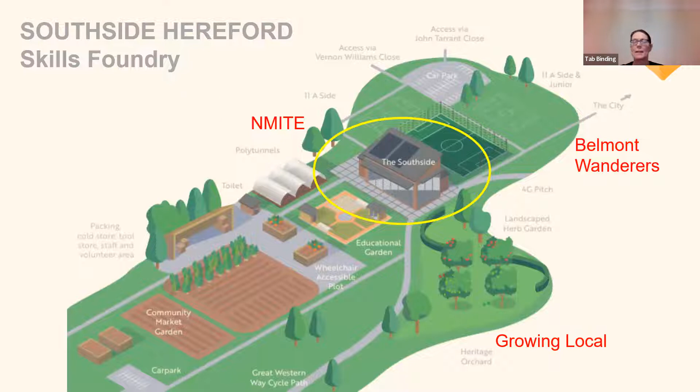The Southside Hereford University Design Challenge is interdisciplinary, cross-university, and a team challenge to design, engineer, specify and cost a community building from timber to Passivhaus standards. It's a live building, about 800 square metres, with a budget of 1.6 million. The site is on the boundary of two fields, a greenfield site, formerly park and farmland. I'll pop a link in the chat.

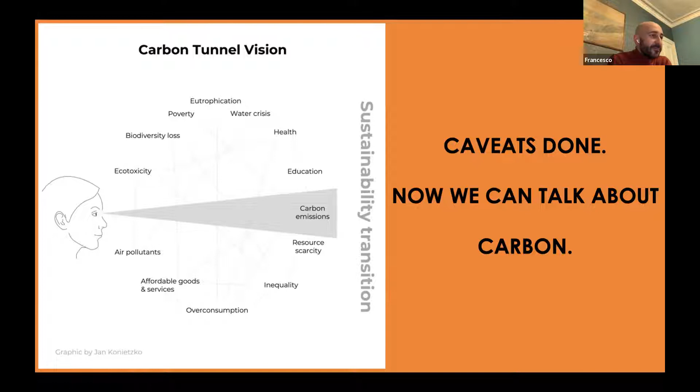But it's not as simple - there are other things, not just on the environmental side, also on the social side. It's important we remain vigilant on all the others and avoid this carbon tunnel vision. Now, caveats done, I'm happy to talk about carbon, knowing that you all know it's not the only thing that matters.

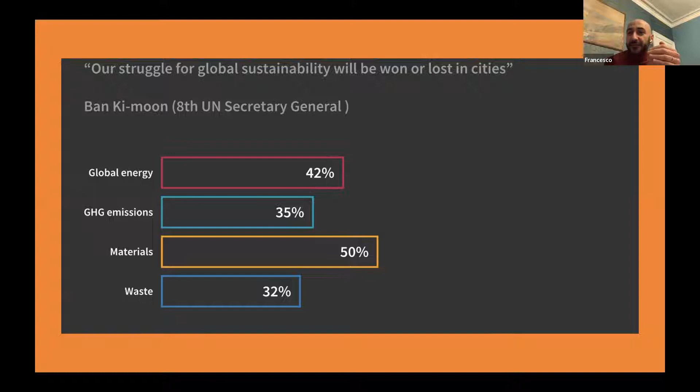If anyone is in doubt as to why we really need to put buildings and construction at the heart of the sustainability transition, it's because they matter the most. Ban Ki-moon, the 8th UN Secretary General, put it clearly: the global struggle for sustainability will be won or lost in cities. That's because buildings and construction are the top contributor to resource extraction, waste generation, emissions, and global energy demand. By working on our buildings and cities, both existing and newly planned, there's a lot of good we can do for the climate crisis.

Surprisingly, building regulations in this country have been around for decades, and at a European level, generally in the Western world, we've worried a lot about what happens to buildings when we are in them. That's logical, because that's when we experience the building, so we've worried about energy demand, insulation, air tightness, comfort. But at some point we realized buildings do not just happen to exist - they get built, and eventually we knock them down. So it was important to structure the life cycle of a building to capture everything that happens, not just the use phase.

If you want to build a very poor building from an energy efficiency perspective, there are regulations that, in theory, prevent you from doing so. If you want to build a building that's very poor on the carbon side in terms of embodied carbon, at the moment you can.

The good thing is that 11 years ago, a standard came out of the European Union that started slicing the life cycle of a building into different stages.

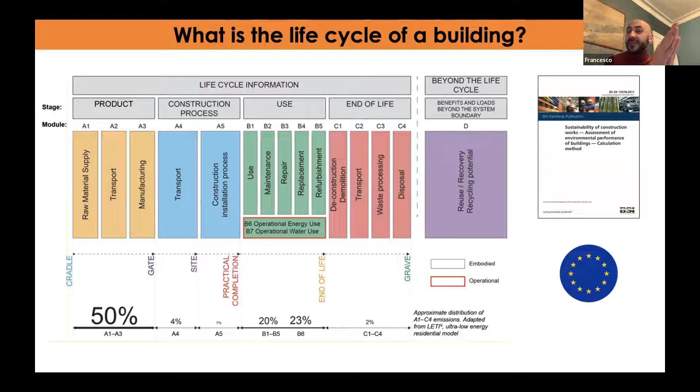There's something I'm sure will be touched upon, probably by Adrian, in terms of circular economy - Module D, which is everything that happens beyond the life cycle of a building. It's very, very important.

Ten years later in the UK, we thought it was time to clarify terminologies, because we couldn't agree on what to call things. There's a nice publication by LETI - if you don't know what LETI is, just visit leti.london, it's a great network really worth following. Also the RIBA and the whole life carbon network I mentioned at the beginning.

To put the terminology clear: we decided embodied carbon was a bit confusing because it involves both things that happen before a building is occupied and after it has been occupied - things we can control to an extent now, and things that might happen in the future where we have really poor visibility.

So we decided to focus on upfront carbon as a terminology that captures what's happening in the here and now - the product and construction stage. Then embodied carbon plus operational carbon make up the whole life carbon. Module D stays out, and is really focused on the circular economy, to ensure we don't mix things that might happen in the future with impacts happening now.

There's still a lot of debate, and there are even subcommittees discussing Module D - I generally take one of my children when there's a subcommittee meeting, because that's the level of conversation they can handle.

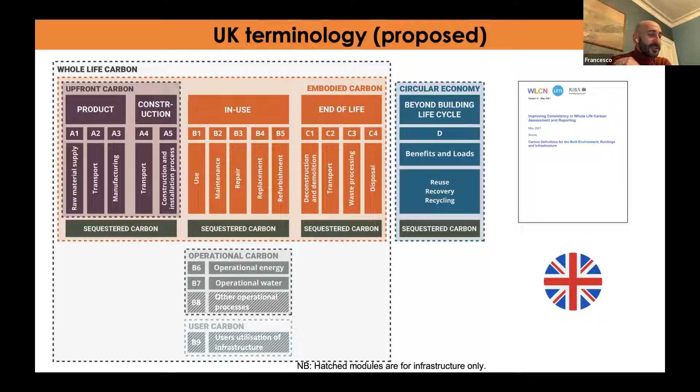Now, after this introduction, consider this simple question: if we're able to achieve zero carbon buildings in operation, then 100% of the whole life carbon of a building like this is going to be embodied. That's why embodied carbon matters so much within a whole life carbon perspective.

Because if we keep making progress in basically eliminating the carbon emissions linked to the operational phase—if you think about Passivhaus, for instance, that's a good example where, in theory, you can achieve a carbon-free home while you're in it. There will be energy going around, but it's coming from renewables, so it's not incurring carbon emissions, which is great. But this implies there's a lot of embodied carbon right now that we need to focus on, and we're not focusing on because there's no regulations in place for it.

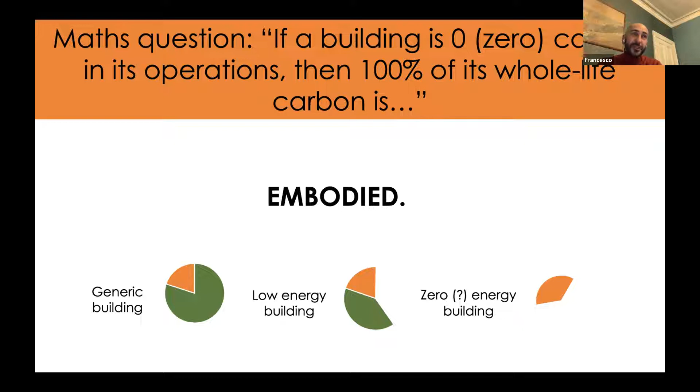Though there is Part Z, a proposed amendment to building regulations, discussed in Parliament tomorrow morning for 10 minutes.

Now, just to explain why this is crucial, I'd like to draw your attention to this case. There are two cases where decisions are obvious because something benefits either the embodied carbon or the operational carbon—no brainer. But there are a few cases, and this is important in a design challenge, because you need to think about the consequences of your design choices in both the short and the long term.

Let's say you have a regular wall insulation—that's product A—with a certain embodied carbon. Then you have a thicker wall insulation, which performs better but incurs more embodied carbon—that's product B. This causes an embodied carbon premium to start with. So at year zero, when you finish construction, you have this premium that you've chosen to incur to put a better product in your building, and that's great. That better product is going to perform better than the alternative year by year for a long time, and at some point it will repay its embodied carbon premium.

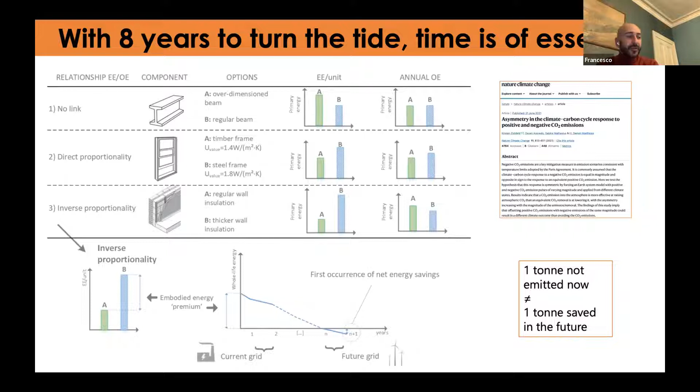So we need to think about embodied and operational carbon as two sides of the same coin. Sometimes they work in harmony, other times in contrast. It's important we're aware of the relationship so that if they work in contrast, we can figure out the trade-off. For instance, if a product takes 20 years to repay its embodied carbon premium, then in 20 years the UK grid is very likely heavily decarbonized. So I'm not sure it's worthwhile right now incurring that embodied carbon premium on a dirty grid, only to break even in the future on a much cleaner grid.

Now, if we go back to timber, which is what we're all here about, I think trying to put the scientist hat on, we should be aware of strengths and weaknesses so that we can make the most of it, because it's a great material.

So timber is low carbon. By low carbon, I mean that the processing, products and manufacturing behind timber incur fewer carbon emissions than its alternatives—and that's a fact. So timber is better than the alternatives because it incurs fewer carbon emissions.

Timber is also bio-based, which is great news, because when trees—general biomass—grow, through photosynthesis they sequester carbon and use it to grow. Timber is also naturally grown. Now, if someone manages commercial forestry, they'll tell me, don't think you just plant the trees, bugger off for 30 years, come back and harvest—that's not what happens. Surely there's a lot of inputs, care and activity involved, but I'm pretty sure it's not as much as quarrying or mining iron ore, transporting it through global supply chains, and firing kilns at 1500 degrees Celsius. So we have a lot of help from nature in giving us this amazing material that we can use to build our buildings and cities.

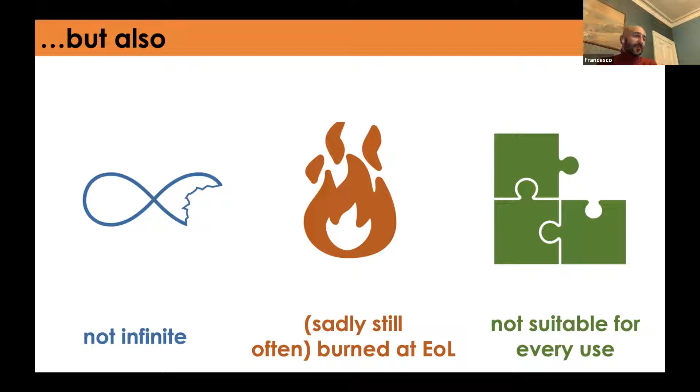So if we accept that, okay, we can do 98% of things with timber, that's great. Think about this design challenge, but also think about potentially informing some calculations in industry.

To prove our point, what we did was—because previous comparisons worked at either a building element or mass basis, and this isn't useful as a functional unit because you don't use the same amount of timber and steel in a building, and a timber beam is very different from a steel beam. So what's the point of comparing structural elements? We thought we'd go in with the full building design.

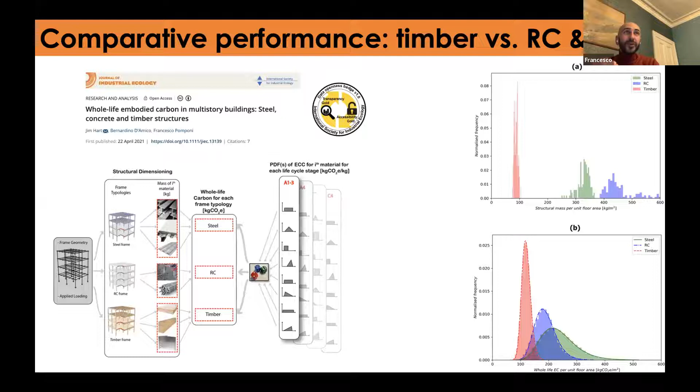To explain why the numbers shouldn't be negative, I also thought it was great to capture the temporal element of the climate impact. And that's where bio-based materials really win.

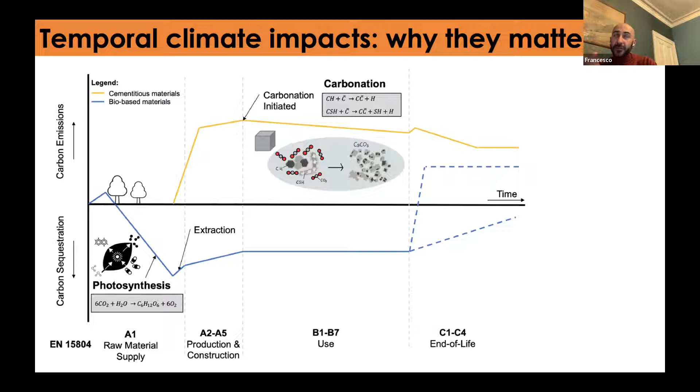So it's important to understand that one material has no chance of having climate benefits. It's always on the positive side. The other material surely creates climate benefits, and it's down to us to determine how permanent the climate benefit is, depending on what we do with it at the end of life.

Some colleagues at Bath did a similar study. They were also looking at a simpler single structure in 3 different configurations. And you can see again that the minute we factor in the time element, there's no doubt that concrete and steel are up and high, and they stay up and high.

With timber, it all depends, again, on what happens at the end of life. Now, the cheeky bit here is that they consider the option, and I think just to be on the safe side, perhaps, of no replanting.

If we see that we're not replanting, then timber is not really that great. So it's really important that timber is understood within the wider context it exists, not just as a material or a mass of building product, but as something that was a living element that we thought was good for our uses as a species, and then we must replace it with another living element so that the great circle can carry on.

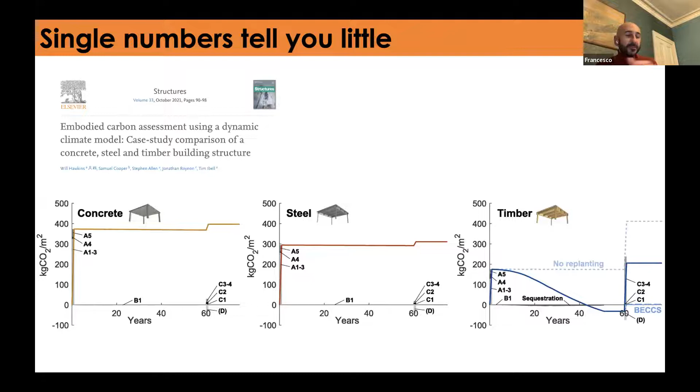Now, none of this dynamic LCA approach is still being used in practice - this idea of including temporal elements - or very few people are using it, just to give credit to those who are. But we should, because otherwise, if we flatten all the numbers into today's time, it's much harder to capture the very different curves that we would see when we take the time into consideration.

So a few points to take home from me, trying to be quick. Timber wins - it's better than its alternatives. And there is really no reason to go into mathematical creativity and produce these negative figures that make no sense, because they violate first principles. It's as if we build the building and we kind of undid all the first principles in terms of energy and stuff like that. It's impossible.

So let's leave the numbers out and let's follow the standards. The best moment to do whole life carbon assessments, even if they're time consuming, is as early as possible in the design stage.

So there is this tendency at the moment that we design a building as best we can, thinking that we know everything about it, and then we kind of engineer it further. Then at some point when we have all the material quantities, we do a life cycle assessment and we get a figure for the whole life carbon impacts of our buildings. At that time, very likely some design choices have been made and carbon lock-ins have already happened.

Carbon lock-in is when, for instance, you're going to use concrete instead of timber, and you're not going to go back to revise the choice of the structural material. Whereas if we keep a lean approach to whole life carbon assessments early in the design stage, then we can test out different strategies.

What I said was focusing on timber, but it's actually true in the wider spectrum of bio-based materials. And if we think about where we are geographically in the global north, of course we will be building new buildings, but it's a fraction of the challenge. The bigger challenge is refurbishing the existing building stock that we have. And for that, hemp and straw are great materials with fast rotational cycles that we can harvest and replant, and they're great to replace fossil fuel-based insulation products.

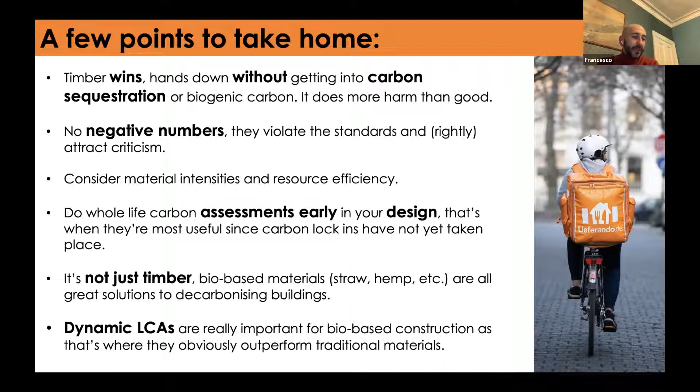And lastly, this idea of dynamic LCA, the temporal elements. I was asked to finish off with some resources. So some of the papers that I mentioned, the standards and consistency project - the colleagues at Bath who published the paper I've shown you also did a great spreadsheet to do this dynamic LCA. It feels a bit complicated at first, but there's guidance and you can go through it.

And a wonderful person in the country called Jane Anderson - she's an incredible expert in EPD, I don't have words for her. She also does an annual update on the global status of EPD, so I put a couple of links there. The IStructE also released a structural carbon tool in order to quickly evaluate the whole life carbon impacts of building structures.

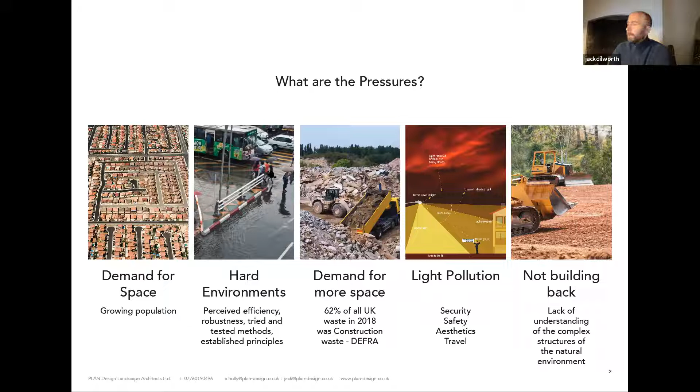Lots more pressures. There's also all the supporting land uses that support development that can have a huge impact on biodiversity. There's the physical elements, such as infrastructure, but also the experiential, such as air quality and noise, which can have, again, less obvious impacts on wildlife and biodiversity.

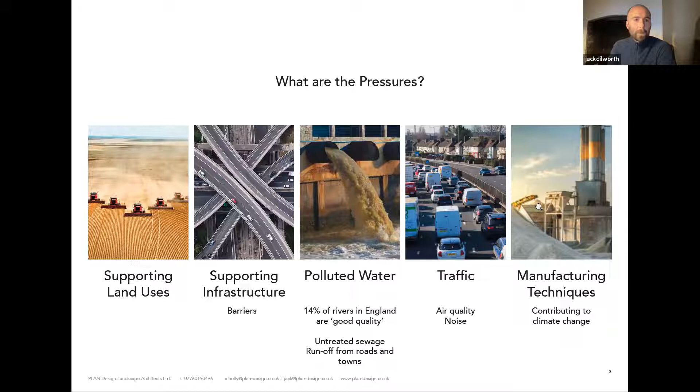And as others have touched on and will touch on, there's obviously the manufacturing techniques of construction materials, which does have a huge impact on climate change, which then has a knock-on impact on biodiversity.

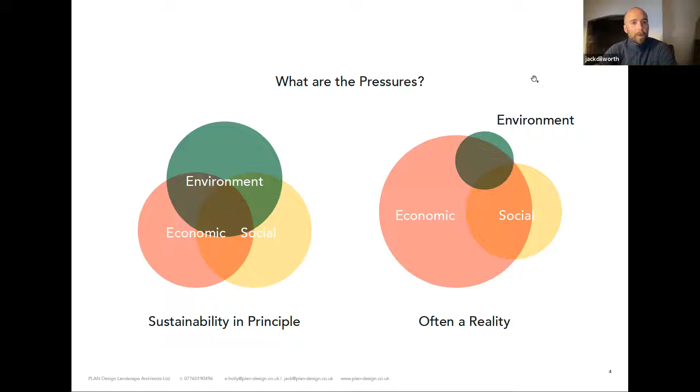So in an ideal world, sustainability would encompass an equal measure of considerations, and we would develop in a holistic manner. And this is a simple diagram, but typically you'd hope for environment, economic considerations and social considerations to have equal consideration. But what is often the case, and what has been the case, is that one of these might take precedent over the others, and that will cause an imbalance.

And what's the result? Habitat fragmentation, which reduces effectiveness of habitat. Some species need large areas to roam, but others need continuity to help establish a network of vegetation. General habitat loss, toxic environments, conflict.

So where habitat is lost, wildlife can be forced into unsafe spaces, and it can be forced to have conflict with humans. And usually wildlife will come off negatively, but in some places of the world, humans might too. And a loss of habitat can lead to a loss of food source. Biodiversity needs to be considered thinking about habitat and food source.

They need to go hand in hand, and that goes through to development. How can we reintroduce both? If food source is low, then wildlife will be forced to forage further afield and enter environments that are unsafe and can't support life.

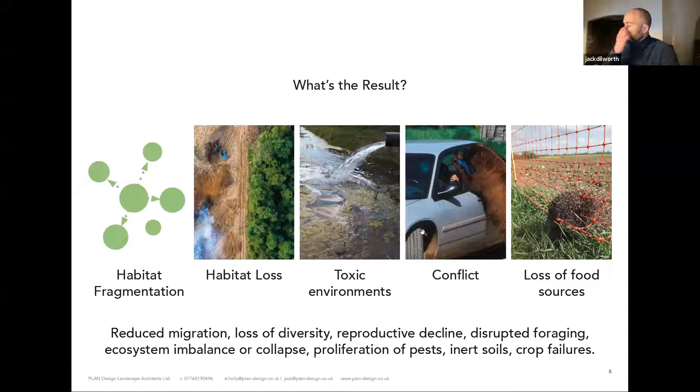But why have we gone down this road, and why do we build this way? There's a sort of an idea that's building momentum that's becoming more and more popular. And it goes back to our early cultures. This may not be true, but it's certainly gathering momentum. If you listen to Radio 4, this idea comes on quite a lot, where there's the idea that in the good old days, humans lived as part of nature, and we were at the whim of environmental pressures.

So therefore we adapted to suit. And a lot of early human art actually referenced nature rather than humans themselves. And that's evident in lots of cave paintings. And at some point we invented farming. And more now, there's an idea that a lot of things started going awry, not just environmental, not just biodiversity, but also culturally, with lots of knock-on effects into our social structures today.

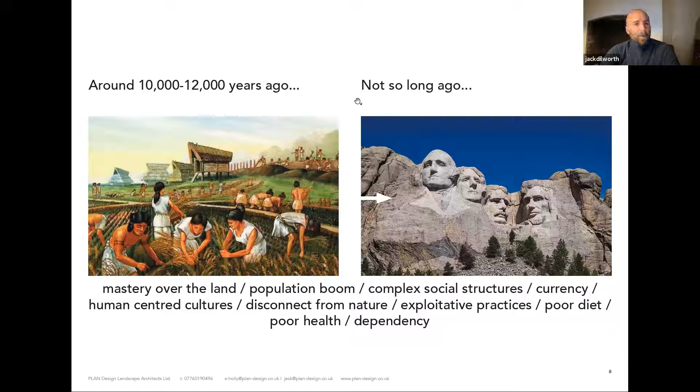And it sort of perhaps got to a point where we decided that our mastery over the landscape for our own needs has led to this idea where perhaps we are masters of nature and we are separate from nature. Now, I think we're realizing the consequences of that now. We've built environments that suit our needs and not the needs of ecosystems as a whole, of which we don't see ourselves as part, or at least we've gone down this route of not seeing ourselves as a part of. Where does it go?

If we keep building for our comfort, what do we end up in? We just stare at our phones in our nice little insulated homes. And what's the future? The metaverse is being bandied around. Do we just enter a virtual world where nothing's real? I'm sure the wildlife of the world would appreciate that, or any people that can't afford these luxuries and have to live with the reality of what we've done to the environment.

Anyway, back to something that's a little more serious. We can insulate ourselves from nature, but the environmental pressures that we've always had don't go anywhere. They just build up around the edges. And that's where the collateral damage happens. It happens to the environment. It happens to people that don't have the luxury of insulating themselves from the environment. And these pressures build and build until something gives. Not only is the environment and biodiversity suffering, not only do people from around the world who are less advantaged suffer, but it overflows, and we will suffer in the affluent Western world.

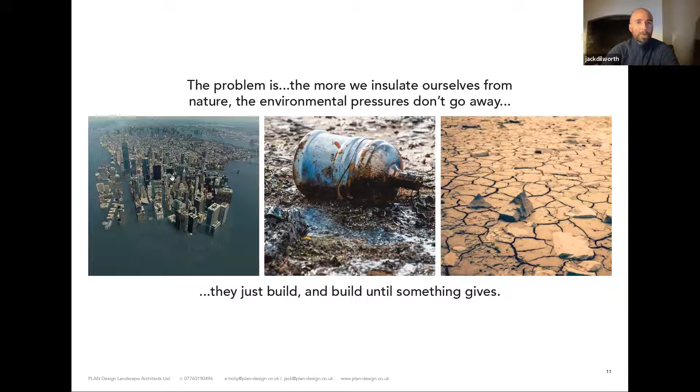There is a biodiversity crisis. More than 70% of ice-free land is now under human control and increasingly degraded. The mass of human-made infrastructure exceeds all biomass. Humans and domesticated animals make up more than 90% of the mammalian mass on the planet, and our actions threaten about 1 million species, 1 in 8, with extinction.

These aren't my facts. The New Scientist has released a series of articles last year that are really good at summarizing the position that we're in, and they use lots of nice diagrams that really hammer home the point. 2021 must be the year to reconcile humanity with nature - that's Antonio Guterres, UN Secretary General. We need to insert ourselves back in nature.

So what can we do about it? There are lots of nuts and bolts things we can do. We do understand a lot of those, but I think fundamentally it's about we need to want to do something about it.

We need to recognize our role in nature. We need to improve our understanding of ecosystems and how we fit within those. We need to encourage education based on our understanding, but also make research accessible, make it part of our daily lives. We need to be inspired, look at nature and see how problems are solved and nature adapts to environmental pressures. And within that, there's a remarkable world that we are uncovering that is totally inspiring, especially in the world relating to architecture and development.

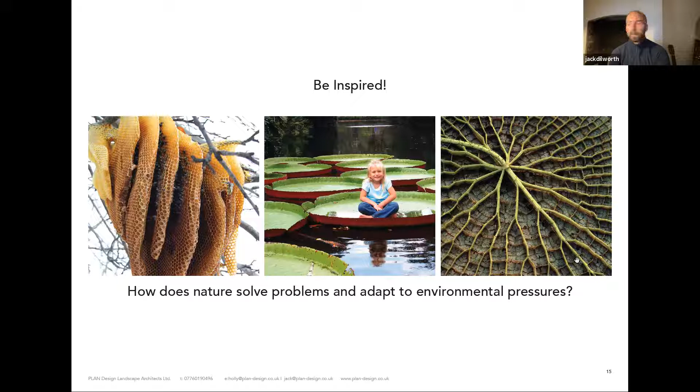Diversify our knowledge base, learn about new materials, learn about processes in nature, how they could marry together to disrupt our reliance on the status quo.

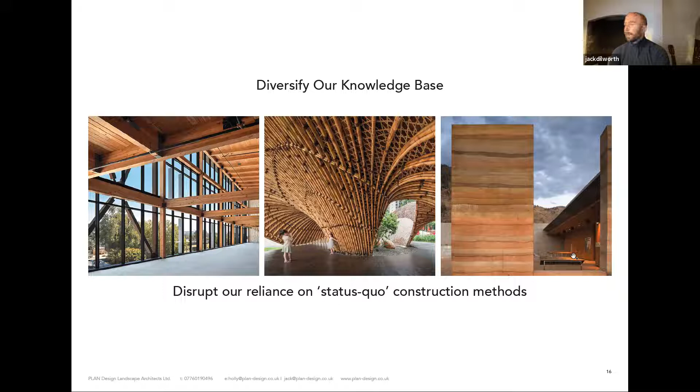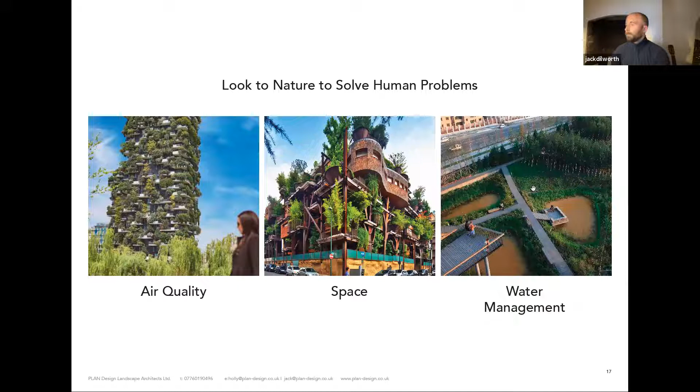As I've mentioned, nature is complex and we are in the infancy of our understanding. Therefore, it's very difficult to come up with a hard and fast answer, and there isn't one. But

The problems are so complex that we need coordinated solutions. Engage specialists. As designers, we're often generalists, but specialists such as ecologists, arboriculturists, hydrologists, among others, they uncover opportunities that can give a project purpose and direction beyond the immediate human need.

Gather an evidence base around which to build a strategy. Evidence is key. Challenge the brief. A client will come to you with a series of requirements, but they're not necessarily going to be an expert. And they're looking for us as professionals to advise based on experience and expertise.

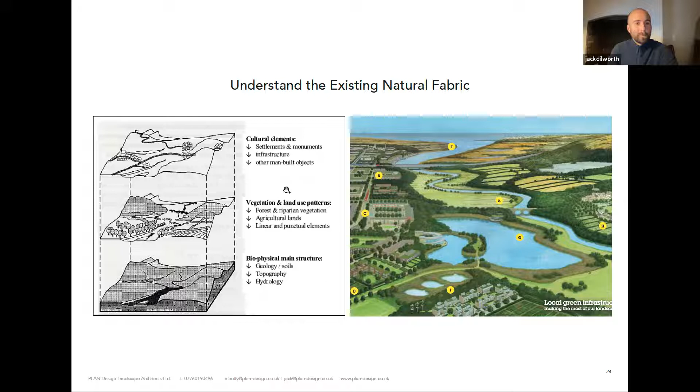Identify opportunities for development that fit within the natural environment and create opportunities to repair the natural fabric. So once you've built that understanding of the physical, cultural and biodiverse properties of a place, see how an intervention of development can actually start to repair the fabric of somewhere.

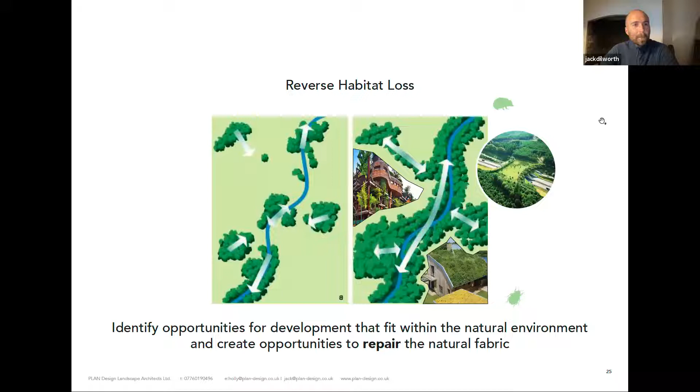As I mentioned earlier, it's not just about connecting up habitats and delivering habitat - it has to be hand in hand with food source and probably lots of other considerations. But food source gives incentive and allows wildlife to thrive, creating a rich tapestry of biodiversity. There are lots of opportunities within development to do this. It's not all about creating an object, it's about layers of improvement.

Once these layers build, before you know it, you've got a design. You haven't had to hit your head against a wall trying to come up with a concept or come up with something that looked great or was impressive. Once you layer up all these considerations, suddenly the design becomes easy. All of your design choices are justified because they will be challenged throughout the process, and the process becomes inherently satisfying.

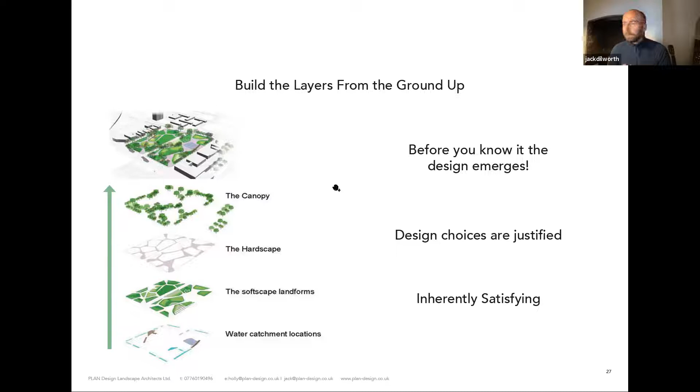Whenever - which all designers experience - we reach the point where we just can't think of anything, that kind of blockage starts to go away if you just go back to your research, back to your evidence base, and build the layers back up again. That really makes the job worth it. And not just build up those layers in a strategic sense, but it goes all the way down to the detail.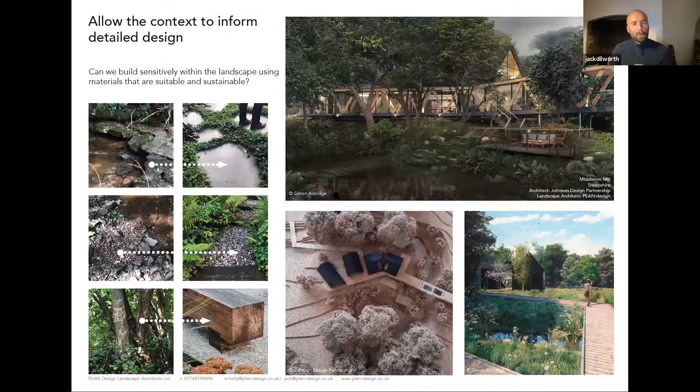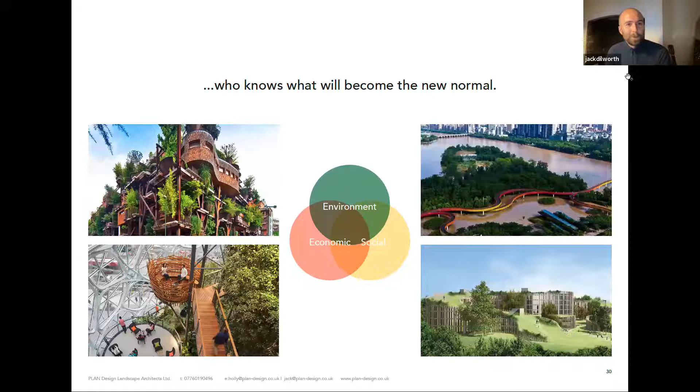Often it will feel like an uphill battle. Those pressures still exist - economic pressure is a big one - but have these big ideas in your head, because you'll end up making small decisions which actually go a long way. And who knows what will become, sorry to use the term, the new normal. Thank you.

Thank you so much, Jack, and thank you for joining us again. I forgot to say at the beginning - we first met you on the TRADA challenge down in Cardiff just before COVID started. Yeah, long time ago, it feels. It feels like an eon ago, doesn't it?

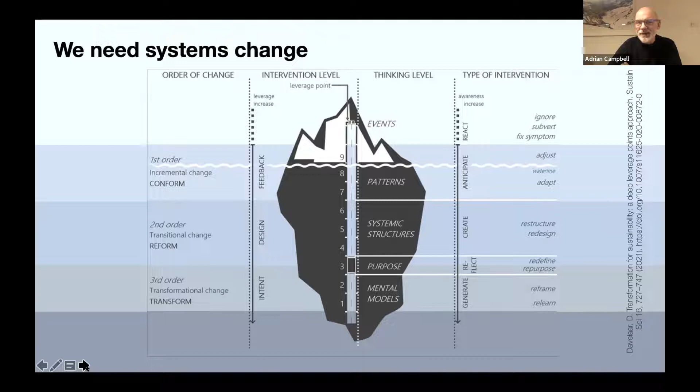Apologies here to Jack. I think what's really evident to me is that this model of interconnected, the Venn diagram of sustainable development, where somehow sustainability is the bullseye in the middle, I don't think works. I found it really difficult to apply this into project work as an engineer, so I don't use it. I actually banned it on projects I was leading in my previous consultancy, because what's been noted by Jack is that we have this very anthropocentric view that somehow economic development can buy our way out of the environmental limits that we're suffering.

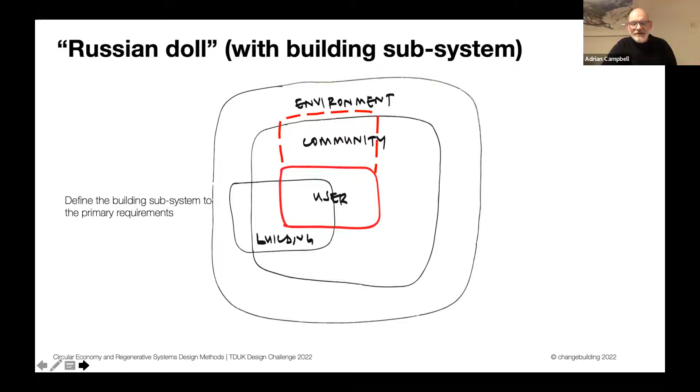And then if we think of buildings as a subsystem of this, they fit within those limits and they share their values into the community, but within the environment.

And we can think of the economic model similarly as a subsystem within that as well. The interesting area of dialogue at the moment is how people are looking for different models for the economy to actually bring in natural value, bring in social value, work within environmental limits, and value those much more explicitly than we have in the past.

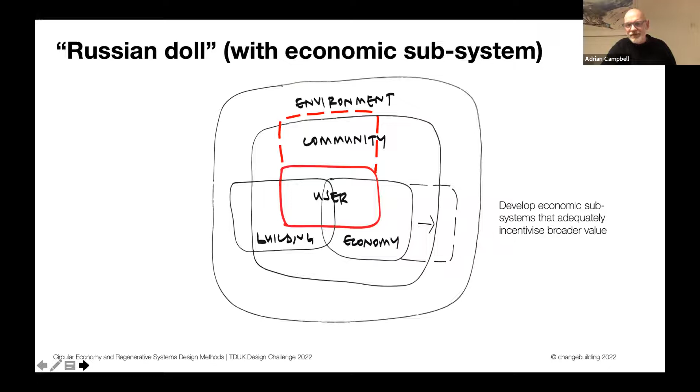So we need a new model for sustainable development, thinking about the environment, community, and these subsystems of our work more clearly. I'm going to talk about the circular economy as perhaps one way of rethinking economic models. The single takeaway is that we move from the linear take-make-waste approach to one which is more about making, using, and returning materials to maintain and value them throughout their life, past their first use into multiple uses, to limit impacts, limit resource depletion, and make the most use of valuable resources that we have.

Although there are very popular definitions, I think for most of these things we need to recognize there are multiple schools of thought at play here. Many of these have been around for a long time and been used within the industry to influence how people think about projects in multiple ways. So there are no single definitions for this, in my view, and you need to come to your own view about what you think and understand by these ideas, not just accept the popular viewpoints. I'd encourage you to read as much as you can from multiple sources to come to your own understanding of what these things are and how you apply that into your work.

So biomimicry has come up, as Jack was just showing. Cradle to Cradle is a really influential book by Braungart and McDonough. Natural capitalism and this idea of regenerative systems development, which I'll come on to later—so many schools of thought.

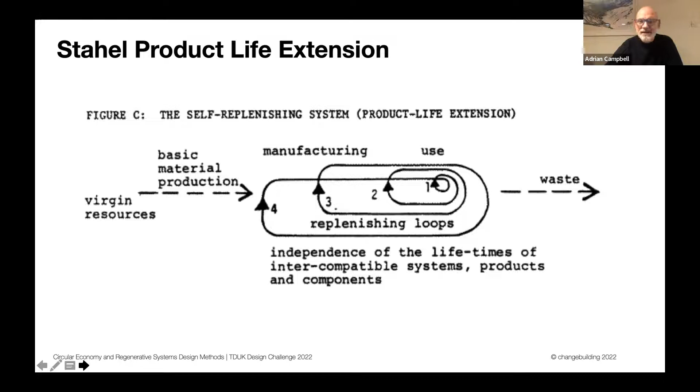So what I did as part of this research—and you can find the paper, I think I've linked it on one of the slides you'll get a copy of—I wrote a paper a number of years ago called Mass Timber in the Circular Economy, where I tried to think about how this applies to the construction industry. What did I think? So I came up with a slightly different but simplified model, which I thought was more in keeping with typical terminology we use in the built environment rather than fast-moving products.

So I came up with this model, heavily influenced by Stahel, thinking about making, using, and reusing components. But the other thing that struck me at that time was that we weren't thinking about how we improve things, not just keeping them in stasis, which seemed to be part of the terminology around the circular economy at that time. That's slightly changed now—I think the Ellen MacArthur Foundation have tweaked their terminology a bit to look at this in a different way.

But I think the important bit for me was not the diagram, it's how do we apply that into projects. So I identified a number of systems actions which I thought were important to understand and how they influence the work we do in design.

So, looping materials through multiple flows of life and end of life and remaking, making sure things last as long as possible by holding them in place for extended periods through product life extension, and looking for different models of service rather than making new things. How can you get somebody to provide you with a lighting service rather than buying lights themselves? How do we look at ways of enhancing and repairing our environments, which is what Jack was talking about in some of his work.

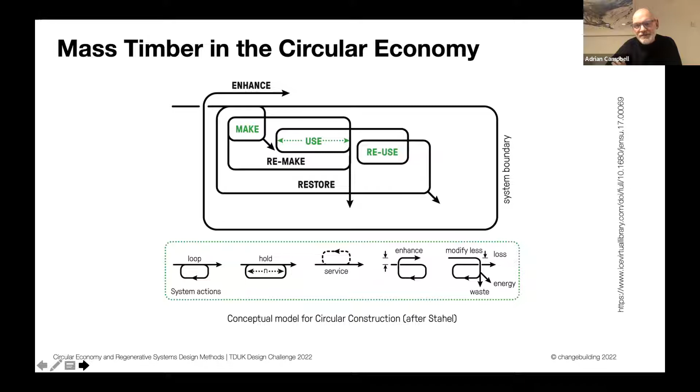But how do we actually modify things less? Rather than continually applying different processes to materials, how do we simplify that to make sure we don't put the impacts into the materials at the beginning, but actually make them more reusable at the end. So I was exploring some of these functions and how they might apply to various projects, and I'll come back to that in a bit.

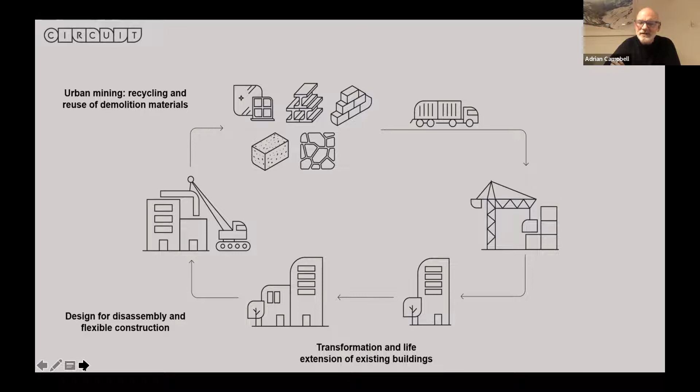There are many really useful bits of other work out there. I'll just highlight Circuit and Andrea Charlson's fantastic work at places like London. Lots of this is exploring new models in the marketplace and how we actually apply this into projects. So what used to be recycling targets is now seeing emerging reuse targets applied into projects shortly, and concepts of urban mining, looking at ways we can connect suppliers to people who want materials through digital systems, databases and platforms. These are all emerging quite actively in the marketplace, with many people thinking about how they deconstruct buildings now rather than just demolish them and gobble up all that material into hardcore. So we're actively looking at ways of reusing materials in process—do look up Circuit and work by London as well.

The other thing which may come up for your work, and you have to think quite clearly about, is: where do you start a circle, really? The linear economy is easy, but where do you begin in a circle? So with some work through LETI, I suggested reworking my original concept—what happens if we do reuse at the beginning of this process? Lots of conversations say, let's enable the circular economy, but why don't we just do the circular economy right now by reusing?

So you can see an emerging conversation around functional reuse of buildings through retrofit first, ways of actually designing with materials that are reused in the first place. Those things are more complicated, but much more interesting to think about, and probably much more impactful in terms of reductions right now in building emissions than other ways of enabling circular economy processes in the future.

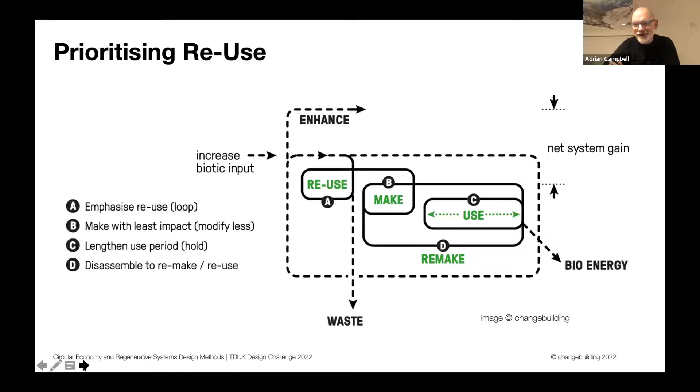The missing thing to this, and one explored in the paper, was: what is the market? What we don't have is a functioning market which prioritizes and values some of these material flows currently. It's really interesting about Part Z and embodied carbon being brought into building regulations, etc., but we've got to look at materials in the round and how we make it more economic and develop broader markets to enable these things to happen automatically, which is what markets really do well.

The interesting piece out of the study was that I thought there was like a ten-fold factor of value to be leveraged out of taking old wood material—about 50 euros a ton for biomass when I did the paper, and about 500 euros a ton for the input cost of CLT into new buildings. So somewhere between that 500 and that 50 value, there was a market to be made in terms of the economics of reuse of timber overall. That needs to be explored, but I think it's a market system we need to develop, not just a technical one.

I think Charlie, who's on here, might recognize some of this data, so apologies, and I hope I've got it right. I've tried to burrow into this, but what's really interesting is some of the metrics behind assessments and where those are. Francesco noted the RICS professional statement, which has values—I'm sure they'll update in the forthcoming update—postulating what they thought was the end of life for timber. We have to think about what wood we're talking about, because there are many different types of wood with very different lifespans and uses. But they were suggesting that 75% of this went to biomass and about 25% to landfill.

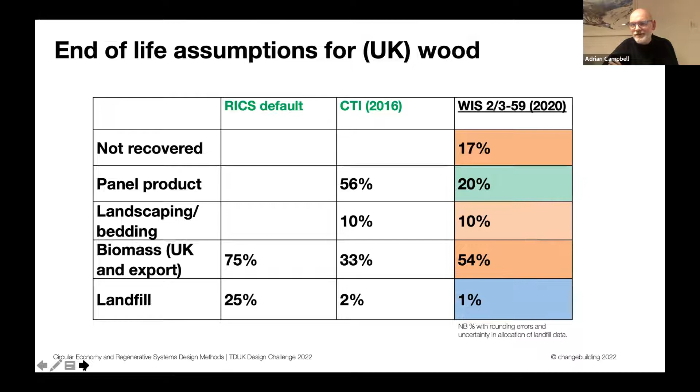So this is one of the diagrams I thought I'd show, because I think it starts to reveal some of the issues Francesco was talking about regarding end of life, and this difference between an early pulse in terms of carbon through manufacture of mainly mineral-based products, and the late pulse we get in terms of timber-based, bio-based products at their end of life, either theoretically through the carbon accounting methods, or actually technically through the way that we dispose of and reprocess materials.

So this is data again in that report, which I've delved into to try to put percentages on, which I think are consistent with the data in the report. But the really important bit is to actually look at the potential end-of-life terms that come through these different uses at end of life.

So obviously you've got zero when we actually burn anything - that's immediate emissions, adding immediately to global warming and global forcing. We've got some aspects that are quite short, I'd have thought, like wood for animal bedding and surfacing, which will all end up quite quickly as emissions. What we have to do is find better routes for the things that get recycled and reused into new panel products, which are much longer and will retain and store this carbon for much longer.

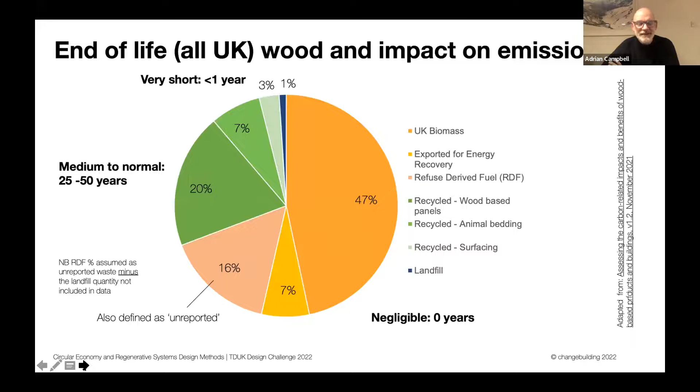So when we're thinking about these end-of-life uses, we also need to think, again as Francesco was emphasising, about the term and the temporal issues connected with carbon, and make sure that we retain as much of that in use, locked up and not emitted, as possible. So let's think about that.

I wanted to turn to this idea of restorative and regenerative systems. So you've probably heard about the circular economy, and if you haven't heard of regenerative sustainability, I'm sure you will be soon, not just by me but many people. It's a broadly popular emerging theme, very much connected to what do we do about this large system challenge, because it's quite evident that just getting towards net zero is not going to be enough.

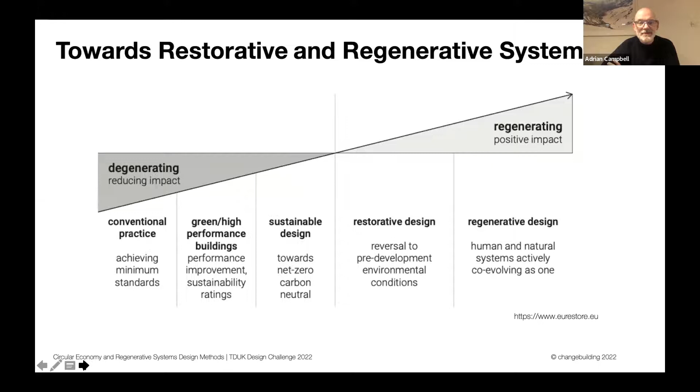So absolute zero as a strategy popularized by others - what do we do? Because things don't stop in 2050 when we suddenly magically become net zero. We'll have to do much, much more to repair it. And this, to me, connects much more to this whole idea of climate and climate justice and global equity between a developed north and an undeveloped south, in terms of what we do and what is appropriate in our approaches - it's about responsibility, not just about technical systems. Like the circular economy, there are multiple interpretations of what this means and what we should do about it.

So I've given a few screenshots of material I've come across, all saying the same thing: that we need to move from depleting, degenerative systems to restore, repair, and regenerate our systems overall.

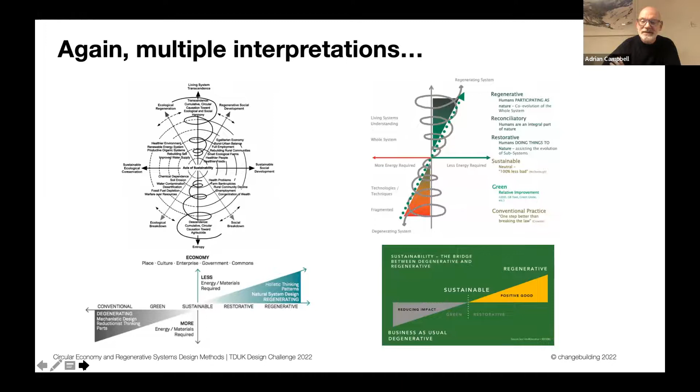This is not just an environmental nature thing. It's also, as Jack was talking about, our connectedness to nature, and our approach of developing in harmony with nature, not just using natural systems, which is much of our thinking today. So this is how I've tried to summarize it for students I lecture to at Southampton - the simple wedge of moving from degenerative, to restorative, to regenerative systems. But that intersection point along the axis is, to me, quite an important one.

But what we also might mean by regenerative sustainability systems - here's one by du Plessis, an academic from South Africa, talking about what regenerative systems might be like, which is about the way humans can co-evolve with nature, looking at context. These are really important topics for you to explore in your project as you go forward.

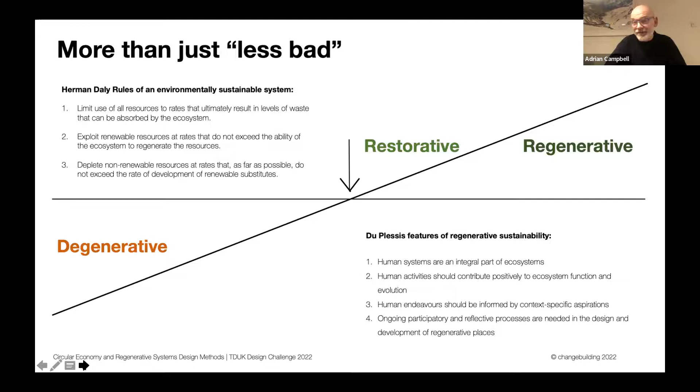What I would say is that it's certainly not what is written in the GLA's whole life carbon tracker. I've come across this, and it's really disappointing from consultants who have cottoned on to the idea that regenerative systems are really important. They put this really awful explanation of what regenerative design is into a public-facing document. It's awful.

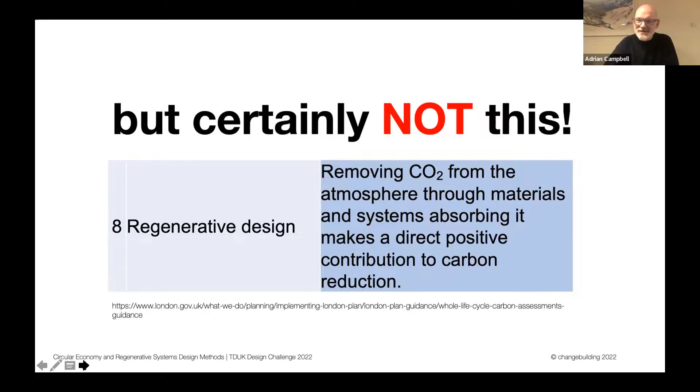So they've noted it, this overly simplistic idea that it will do something about removing CO2. If we are going to talk about regenerative systems, let's talk about these emerging ideas of a much broader systems change, and not oversimplify it and undercut it with this kind of terminology in public-facing documentation. That should be removed, in my view.

So what I thought I'd do is try to bring this down to a level relevant to your design projects. I'll give you an example: as the Positive Collective, with friends Patrick Osborne and Florence Collier, who are an architect and a passive house engineer, we worked closely together on a competition called Home of 2030, for Homes England.

We were one of the finalists there, and we've just been shortlisted as a finalist for the UN Habitat Climate Smart Cities Challenge for Bristol. That's a bit of a mouthful, but we're really happy trying to push and explore these ideas in practice, and connect that to project-based work.

So this was our idea for a housing system. I know you're not quite doing a housing system, but some of the ideas hopefully still hold for what you might be able to do. The first one was homegrown products.

Our friends up in Scotland are busy trying to generate homegrown CLT as panel-based products - shout out to them as well. So how do we look at different ways of affecting the bigger system by using materials which are appropriate from within our resource base?

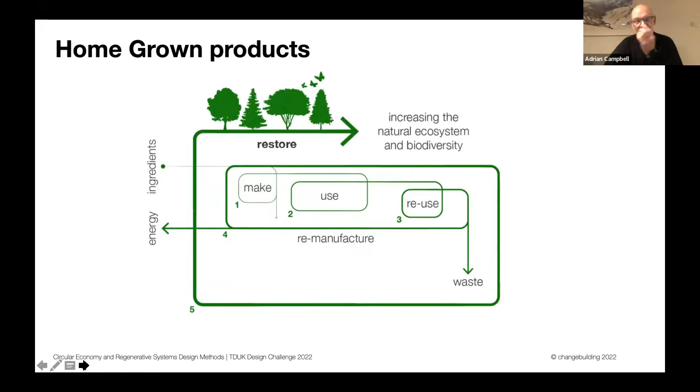We were looking at C16 plus as a species-specific grade for the UK, and at lower grade materials and how that might be used in mass products rather than constantly specifying C24. So what was the appropriate use of materials relevant to the resource base we had, and how can we encourage the use of bio-based materials as a way of incentivizing repair of natural systems and improvements in biodiversity. So we were looking at homegrown products and their use as one example.

Like Robert and others, I'm a big fan of off-site manufactured construction as a better way of delivering the buildings that we have to do. But this idea that design for manufacture and assembly is important - actually it's not the overall systems approach that we really need to be encouraging.

Some people would say we need to design for everything, so it's DFX. But actually, if we follow the design for manufacture and assembly idea about the efficiencies and benefits of off-site construction, we should be thinking about incorporating aspects for disassembly of buildings right at the beginning as our systems view. So I'd suggest DFMA plus D should be at least our combined assumption about how we approach and utilize off-site methodologies. Don't just think about how you can assemble it, but how this might be separated, disassembled and reused at end of first life - not end of life, end of first life - when designing your systems.

We also looked at durability. Going back to this idea about extending product life, one of the issues with timber use is durability, if it's not detailed correctly and assembled correctly within envelopes that maintain it at a moisture level compatible with long-term performance. So detailing is really important, and durability connects to commerciality and warranty. People are going to price out or not give insurances and warranties for products they think are risky - that's just how insurance works. So we need to be really clear and detail appropriately for that.

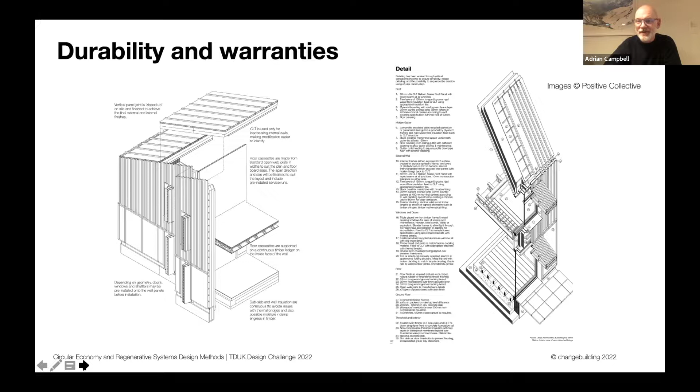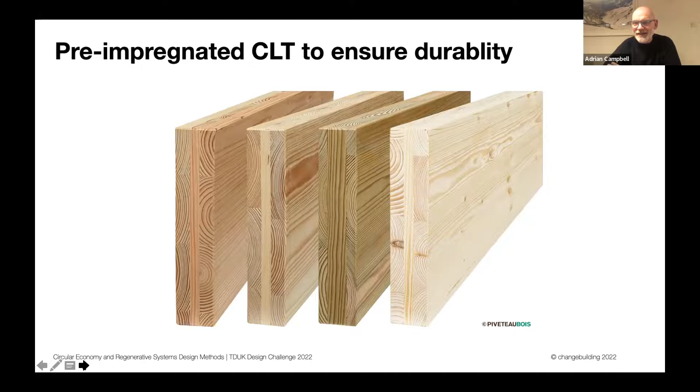Where that becomes difficult - it was really interesting, we talked to friends at Piveteau Bois, because they actually have pre-impregnated CLT as well. So where a product is risky, you can reduce that risk by looking at ways of preserving, either surface treatments or pre-impregnation as alternatives. There are ways you can alter and improve durability while still using bio-based products. But then we have to think about the impact of those preservative treatments and what they do to health, well-being and end of life. So we need to be careful about that, but those are also possible.

I thought I'd leave you with this, as I'm getting to the end and you're all wanting to go home - I've got a link to Kate Raworth giving a talk about Bill Sharpe's three horizons principles, about repatterning design towards different options. What we struggle with, and what everybody struggles with, is finding ways to deliver this viable future we can all imagine, but in ways consistent and realistic with what we face currently.

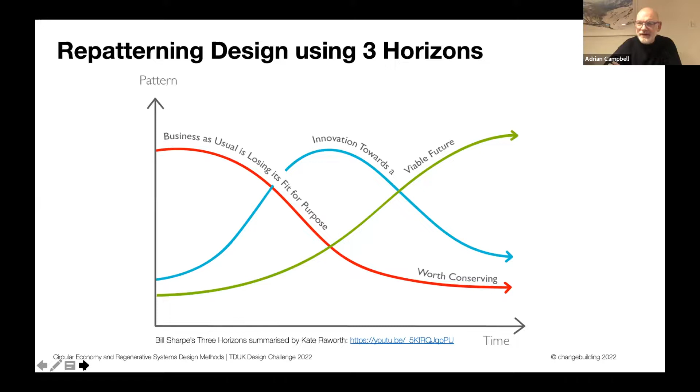I think it's only about 5 minutes long, won't take you long, but it's a very good way of thinking around the design challenge you face and practical ways to introduce innovation whilst targeting the future we're all trying to aim for. As a way of thinking about some of these big system ideas you've been thrown tonight and through all these other great lectures, I'd highly recommend you go have a look at that video - I find it really helpful in my work. So I'll leave you with that, and good luck with your work. I'm sure I'll be delighted to see what you come up with, Tabitha. Thank you.